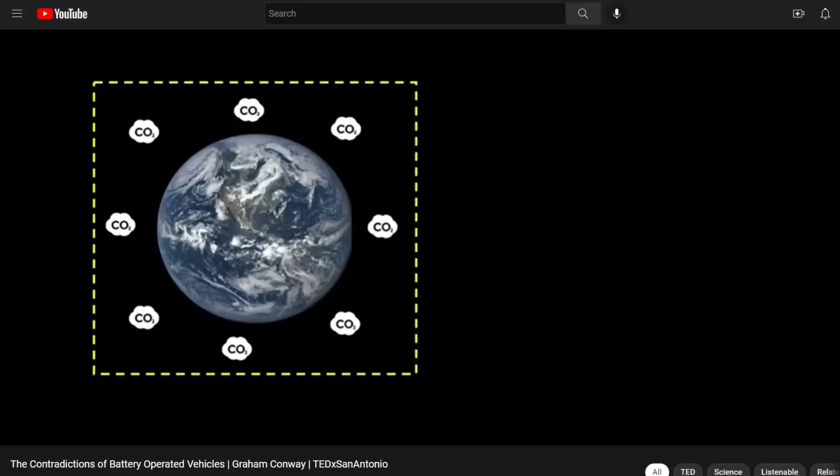The problem of climate change is a global one. It is believed to be caused by increasing CO2 concentrations in our atmosphere. If you put a box around the Earth and measured the gases trapped inside that box, you would indeed find CO2, and that CO2 levels are rising. What is causing CO2 levels to rise? Well, one source is the cars and trucks that we drive. These emit CO2 from the tailpipe, and the way the industry currently measures this CO2 is like putting a special box around the vehicle and measuring what's inside the box.

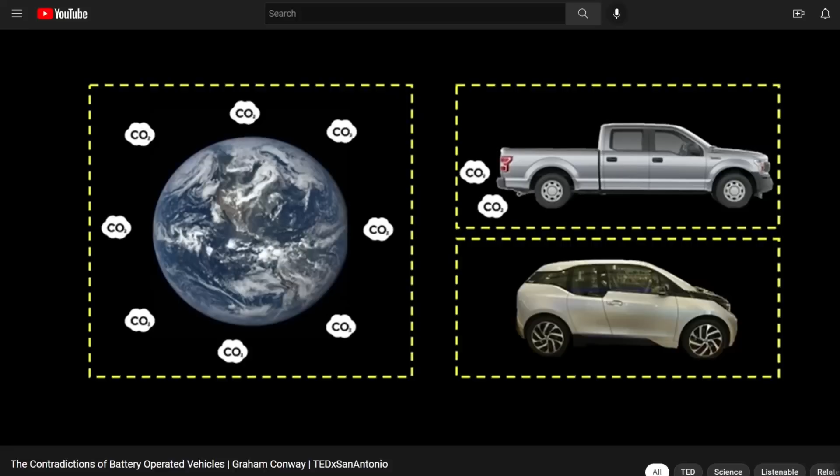Society's solution to the problem is the electric vehicle. Because if you put a box around the electric vehicle and try and measure CO2, you won't find any. So based on this way of measuring CO2, we've decided to call these zero emissions, and we call these dirty. But let me show you why this is wrong. Consider that instead of changing all vehicles into electric vehicles, we instead change them into horses. Now, a horse breathes in air and it breathes out CO2. So if you put a box around the horse, you would measure CO2.

If you rode that horse the same distance as you drove the car, you would find something quite shocking. The horse emits as much CO2 as a Corvette.

Okay, I want to pause it here. First of all, I think he started this talk really well. He comes up with a very controversial statement which gets everyone's attention, and then he talks about electric cars and the pros of them and how he believes in them. So it's very disarming. So I think he does a great job.

Conway works for a think tank that's funded by Tom Slick, who's an oil magnate, and so it's not an unbiased opinion, but I think we should go away from the idea that because something comes from a certain source, we can just discount it. I don't think that's the way to analyze data. You should analyze the data on its own merits. And if they're saying the truth, it doesn't matter what background they are or what bias they may have personally, because everyone has biases. And so we have to analyze what things people say on their own merits.

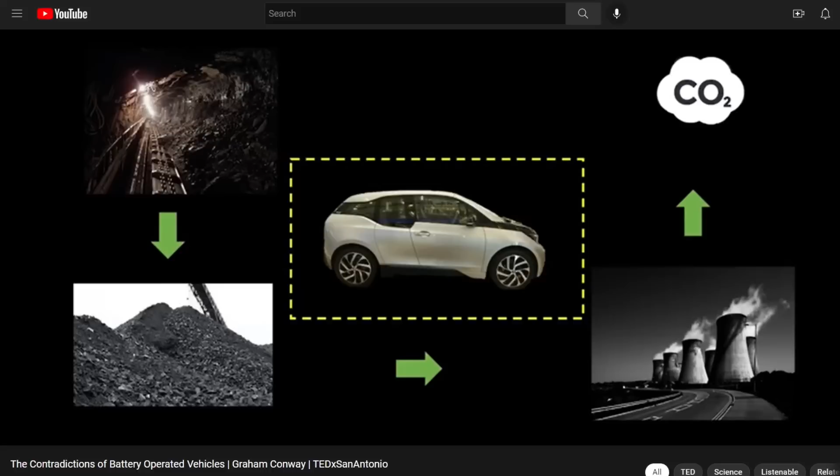A large proportion of our electricity comes from coal. Now, we dig coal out of the ground in large quantities. We then burn it in power stations, which produces CO2. You can see there is no arrow along the top of this diagram. That CO2 is not in a cycle, and it is increasing.

Okay, so I wanted to go back to that. He says a large portion of our electricity comes from burning coal. That's true on a global scale. On a global scale, places like China and India still use a ton of coal. In the United States, coal, I think, is less than 20% of our energy production. Natural gas is much higher, which is a much cleaner source in terms of CO2 production.

In the UK, it's even less than the United States. And different parts of the country use different energy mixes. If you live in the Pacific Northwest, it's a lot of hydroelectric. There's I think essentially zero coal in the Pacific Northwest. In California, it's very little coal, probably less than 10%. Much more coal out in West Virginia, Pennsylvania, Ohio, that area. So it depends on which part of the world and which part of the country, what your mix is.

But you couldn't possibly know this by only measuring the vehicle's tailpipe. What we need to do is expand our imaginary box to include everything.

And coal isn't the only way we generate electricity. We also burn natural gas and we burn oil. These two produce CO2. Now, you might be sitting there and saying, hang on a minute, I charge my electric vehicle from solar panels on my roof. So that's okay, right? Well, for you, maybe.

And many developed nations are moving away from coal and natural gas to renewable energy sources. But CO2 is a global problem. So let's have a look at things on a global scale. How much of the world's electricity is produced by burning fuel which creates CO2? It's about 2/3.

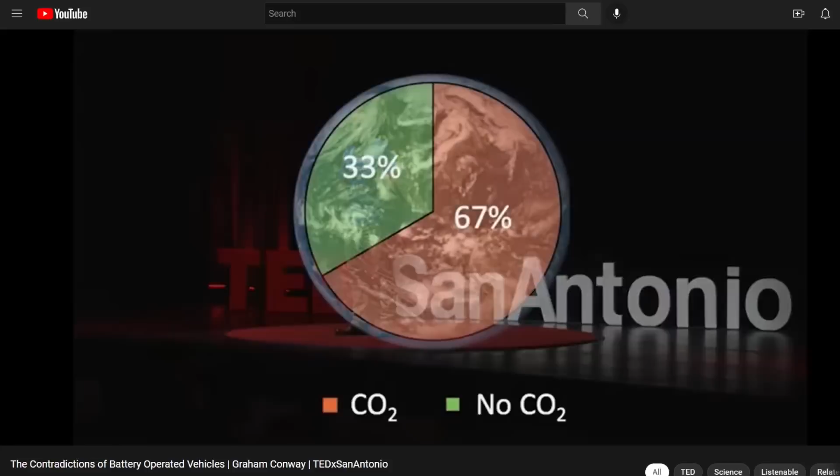Okay, so this is outdated information. It's about 10 years old. It's actually like 61% or 62% CO2 generating now. So you can see when you plug your electric vehicle in, you are probably producing...

Oh, and in California, during the day, in most of the summer, this green part is 100%. It's almost all solar. The energy mix in California, we talked about that in a video a few days ago, but the energy mix is changing. It is rapidly changing, so this is getting better.

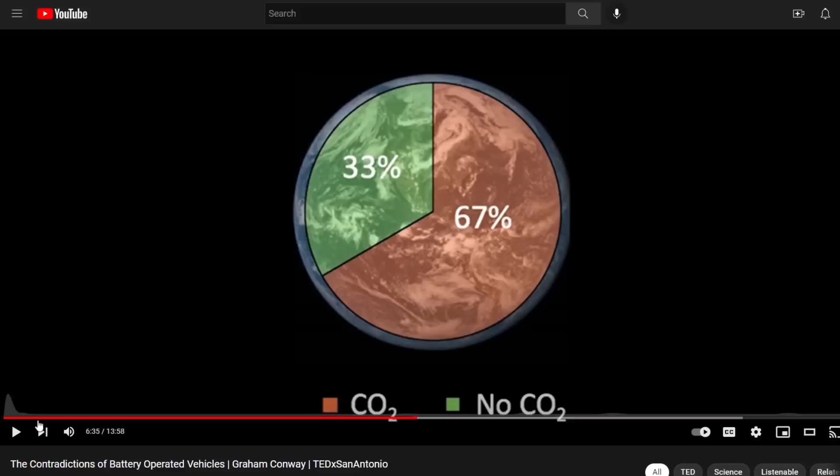CO2, it just isn't being measured. You see, the automotive industry has cleverly found a way to move the problem, not solve the problem.

But is the electric vehicle really worse? Well, to understand if it's worse, we need to look at how much emissions are produced during the life of the vehicle. The average age of a vehicle before it gets scrapped is around 180,000 miles. You can see the conventional vehicle produces about 30 tons of CO2 over its lifetime.

Okay, let's do the math on that. Okay, that's 27,200 kilograms. All right, so let's look at that. 27,215 kilograms divided by 180,000 miles. All right, so he's saying that this theoretic car produces 151 grams per mile traveled. As you can see from our previous things, that is a rather optimistic amount.

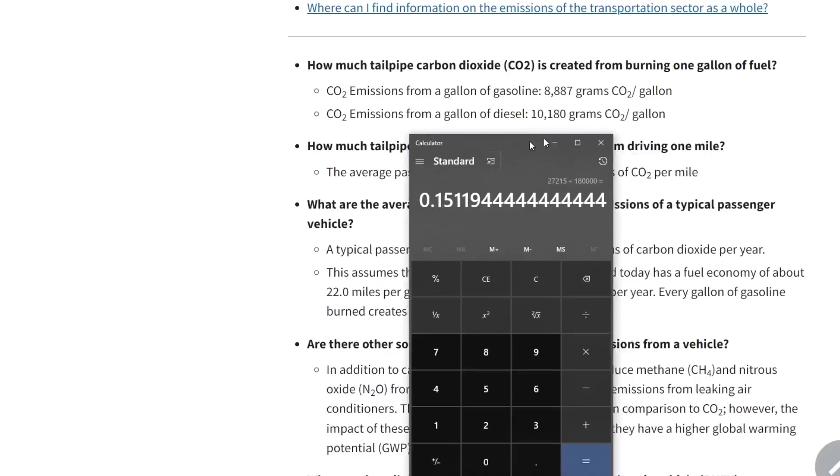So I don't think this is outright untrue, but definitely picking a value that makes his argument look better. Okay, so remember, if you're picking the average car in the United States, it's 3 times as high as this. And the average car in the UK is about 20%, maybe 30% higher than this.

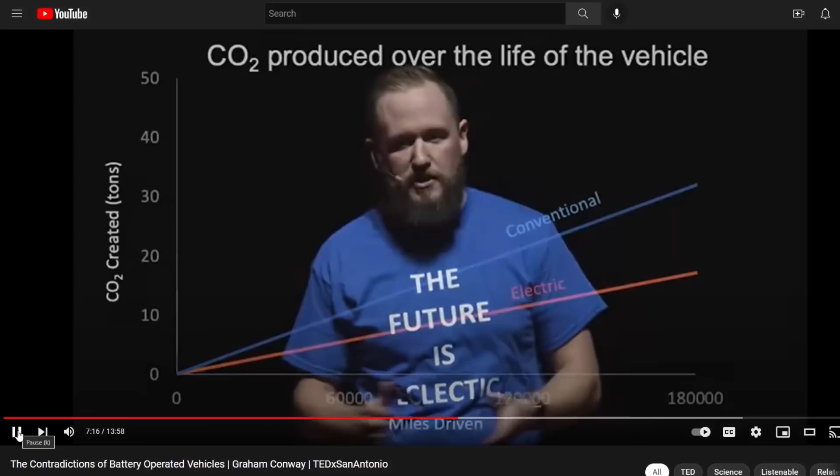How does the electric vehicle look? Pretty good, right? All right, so this is the crux of his talk, these graphs. So we're going to go over these graphs. So he's saying that a conventional vehicle is going to produce 30 tons over 180,000 miles. Now, we know that that's a very optimistic slope, right? In the United States, the conventional car is going to be 2 times that. So this number should be 60. So the slope should look more like this.

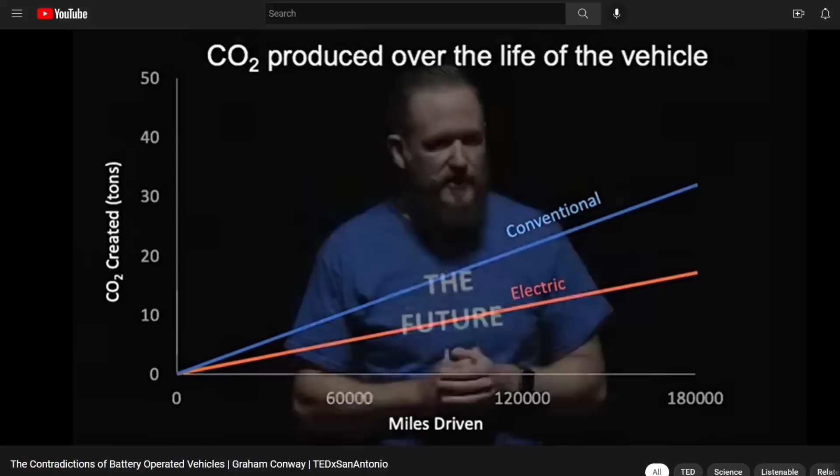But there is a problem with this graph. This graph says that at 0 miles, 0 CO2 has been produced. And if you think about that for a second, it means that the two cars have magically appeared in the showroom out of thin air. In reality, a huge amount of CO2 is produced just making a vehicle, because you have to dig raw materials out of the ground, transport them to factories where they can be formed into car parts before finally being assembled into vehicles. Each step requires energy, and so we create CO2. So you can see the conventional vehicle comes to the showroom having generated about 6 tons of CO2.

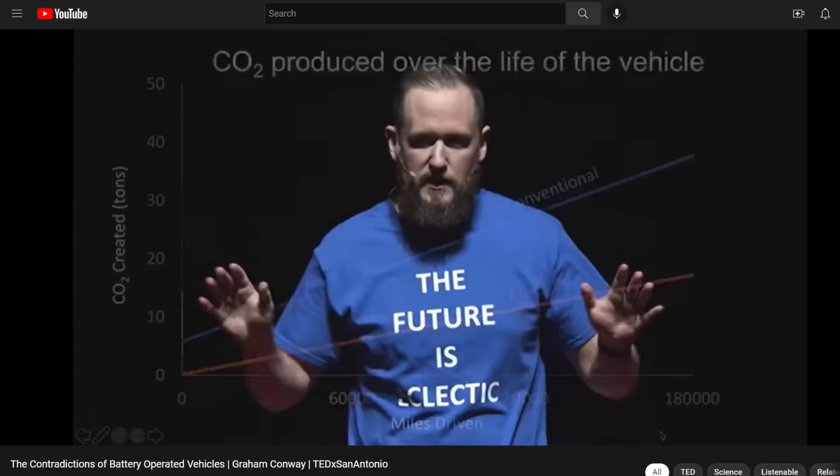And now this is the critical part. Making a battery isn't easy. The materials required are harder to find, and making a battery cell requires a huge amount of energy. So the battery vehicle comes to the showroom having generated about 12 tons of CO2. And you can see you'd have to drive it around 80 or 90,000 miles before you offset that CO2 penalty. All right. So he's making the assumption that the battery of this electric car produces 6 tons of CO2 at its creation.

And remember, these slopes are unrealistic. This slope should be much steeper, like this. And in fact, it should be even steeper than that, because what you don't take into account is he's taking into account the total cost of production of electricity, however, only measuring the tailpipe CO2 production of a gas vehicle. You have to understand that creating gasoline also is expensive. You have to prospect for oil, drill for oil, extract the oil, transport the oil, refine the oil, and then transport the gasoline. So if you do all that, this study said you have to add about 30% for gasoline and 24% for diesel.

So if the average car in Great Britain is 221, you have to add 30% to that. Or in the United States it's 440 grams of CO2, you have to add 30% to that. So if you add 30% to this, it makes it like 550 or something like that. So 550 is basically 4 times this much. And if you do that, this graph should top out not at 36, but at like 120. So this slope should be like this.

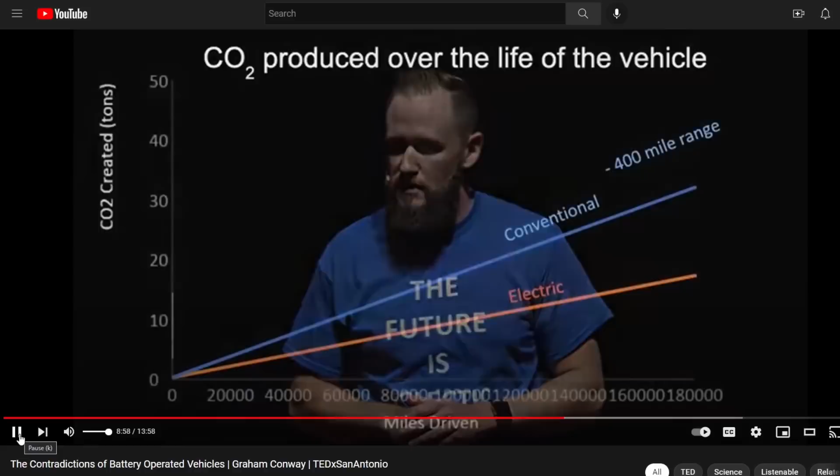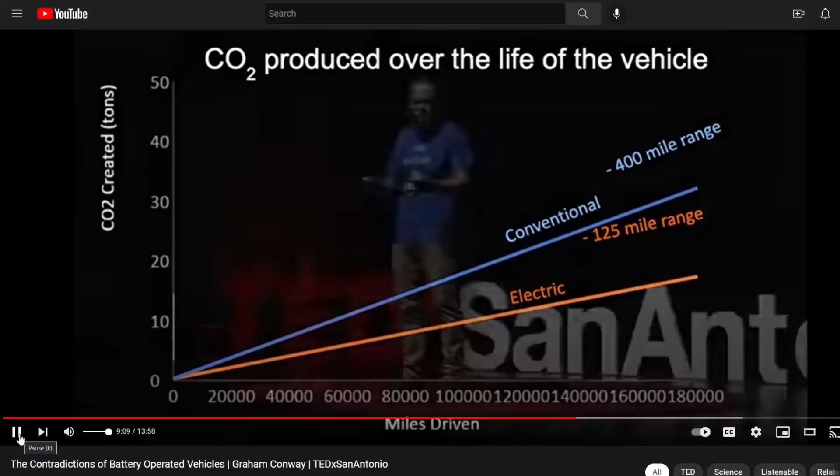You see, the conventional vehicle has a 400-mile range, while the electric vehicle in this example has a 125-mile range. Now, 125 miles might be enough for some of you, but most of us want more. We'd like to be able to drive great distances across the states. Or if you're here in Texas, you might just want to get to the next city. So really, we need to be comparing a 400-mile range electric vehicle. And as you may have guessed, a longer range requires a larger battery, which means a larger CO2 penalty. And now you start to see the problem.

All right. So this is kind of the money shot for him. So number one, I think as most of us are interested in the Aptera, this 125-mile range battery in an Aptera would be a 400-mile Aptera, because the Aptera is about 3 times more efficient than the average electric car. So this electric car with a 125-mile range probably has a 40 kilowatt battery, but the 40 kilowatt battery in an Aptera will go 400 miles.

This 400-mile range electric car is about like an 80, 90 kilowatt hour battery or 100 kilowatt hour battery. And so that's going to take a lot of electricity. But how much electricity does it take? And we know that it generates a lot because mining raw materials like lithium, cobalt, nickel is labor intensive, and then they have to dry it and refine it to manufacture batteries. It takes a lot of CO2.

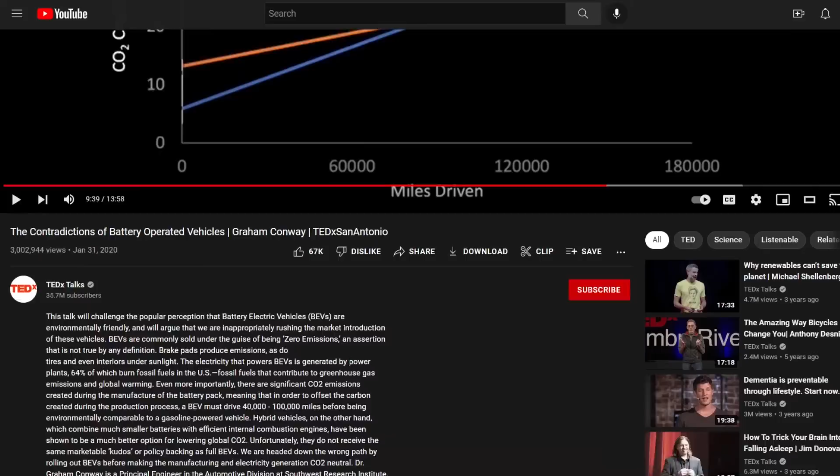So if you look at this, and you know what? One of the things you have to say is when you try to decide who you're going to believe, it's important to look at the sources. And this guy, unfortunately, in TED Talks, you don't cite sources. He didn't put them in the description or anything. So you don't know what sources he's getting this from. I'll put all the sources in the description of this video.

But if you look at this, they looked at several different studies and they show how much CO2 they're producing per kilowatt hour of battery production. And you can see this range is huge. It ranges from like 30 to 500. That's a range of greater than 1 order of magnitude. And that has to do with the methodology of these papers, the way that they measured it, and also what energy source they were using.

So in this one, it assumes a manufacturing grid representative of East Asia. So basically they're using a Chinese manufacturing grid. So that's a very dirty manufacturing grid, a lot of coal. And the battery chemistry makes a big difference. So they can go anywhere from 30 to 400.

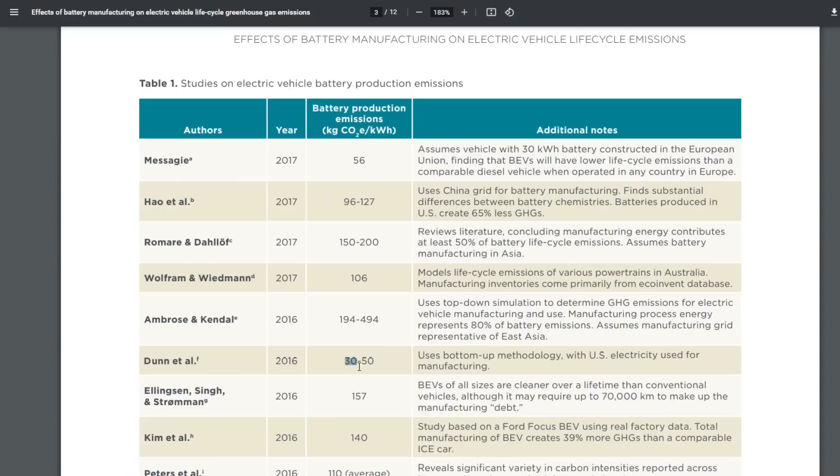So if you look at this, the Tesla battery, let's see what 16 metric tons is. Okay, so 16,000 kilograms in tons, because he's using imperial tons. So that is 17 tons. He's saying that this 400-mile battery is going to add about 20 tons. So that's more than the upper range. This is saying 18 tons, he's saying 20 tons. So he's using the upper range of this scale. If you use the lower end of the scale, that's 2,400 kilograms. Let's see.

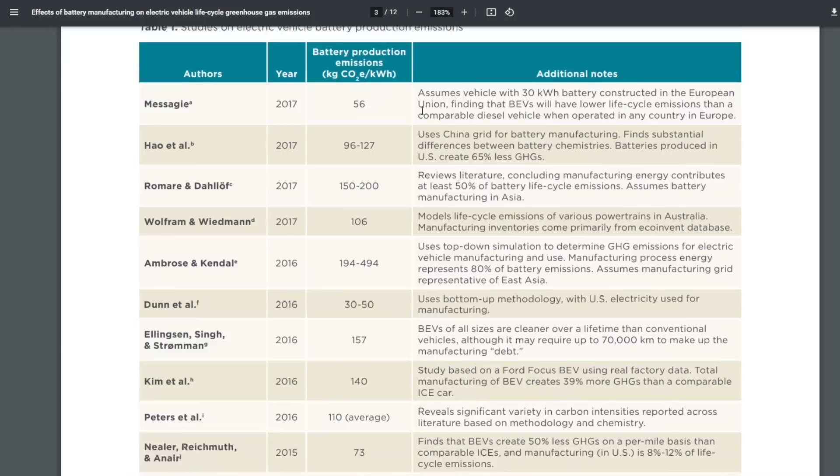So you cherry pick all the data. You use the worst over its expected lifetime. You use the worst possible manufacturing situation for the electric battery. Then you use the best possible scenario for the gas car. And then you don't take into account any of the costs of producing the gasoline and delivering it to your tank.

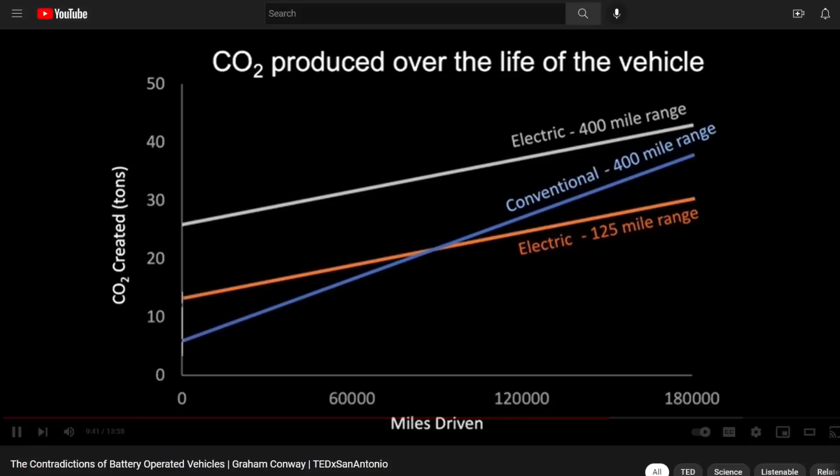It has emitted more CO2 than the conventional vehicle. It has contributed more to climate change than the conventional vehicle, and that is the crux of the problem. It has produced more CO2, but we've measured none. And so society is happy to continue to call these zero emissions. But that is dangerous and unproductive.

But there is something we can do today, using technology we have today, which will make a difference today. And that is to look at hybrids. Hybrids are far more efficient than conventional vehicles because at low speeds, where the engine is inefficient, the electric motor compensates and says, "Don't worry, engine, I've got this. You stay turned off until we need you." And critically, a hybrid has a small battery. So the initial CO2 penalty is similar to the conventional vehicle, while the end-of-life emissions are far lower. In fact, to offset the CO2 from the electric vehicle, you would need to drive it around 450,000 miles.

Okay, again, that is not true. That's only true if you're assuming the worst case scenario for the electric battery and the best case scenario for the ICE or the hybrid car. And if you don't make those assumptions, the graph looks totally different. The crossover point is probably at like 10,000 miles before you offset that CO2.

So if you make the scenario the complete opposite, you assume the best case scenario for the electric and the worst case scenario for the ICE car, the crossover point is probably at like 10,000 miles. The actual crossover point probably is somewhere in between, probably at like 50,000 miles. That's assuming a 400-mile range traditional vehicle. Now, for the Aptera, it would be much, much less.

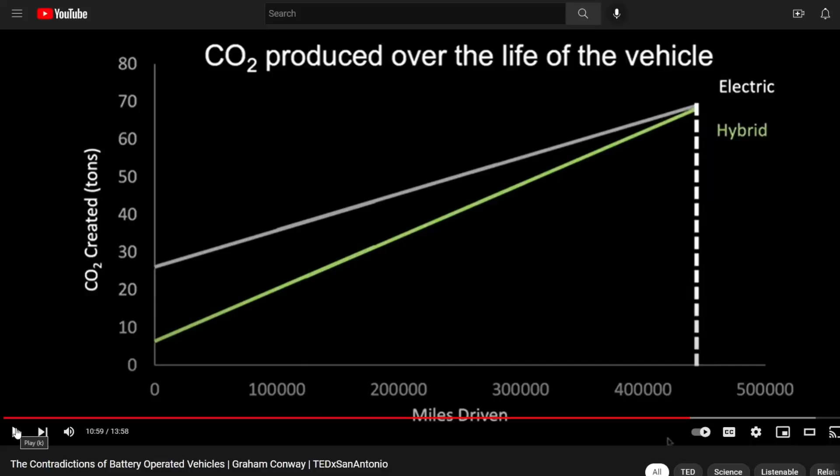But again, I don't want to demonize the electric vehicle. I just don't think we should adopt them today based on the way we generate our electricity and the way we make our batteries. But how can we help the electric vehicle meet its potential? Well, we need to invest in making our electricity generation from renewable sources around the world, so that when we plug our electric cars in, we know there is no CO2 being generated.

I kind of want to go back and talk about this a little bit too. So solar and wind, those are great, but we know that they have their own problems too. Like these turbines, they're huge. They're made out of fiberglass. They're very hard to deal with at end of life. They create a lot of waste.

Same with solar panels. Solar panels are silicon, so they're not a very valuable raw material. It takes a tremendous amount of energy and labor to recycle these, so they're not being recycled. It's just not economically efficient to recycle these things. And so they don't create CO2 as a problem, but they create a lot of waste.

So, the ideal situation obviously is that we use less stuff. This is not the magic answer to everything. Like once we get solar panels and wind things, we can't just go spend all the energy we want. Using less is always better. Being more efficient is always better, which is why I love the Aptera philosophy. Just being more efficient is always better, and using less stuff is always better. Because technology is not going to magically fix all of our problems.

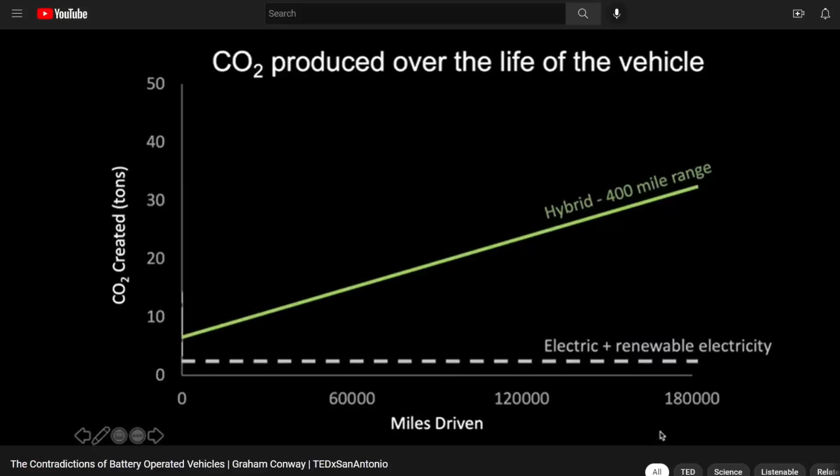And so you can see the potential of the electric vehicle. You can see what it could look like in the future. It's just, as a society, maybe we're trillions of dollars and decades away from being zero and zero. But right now, it's already pretty good. But we will get there one day.

But what we don't want to do today is mislead people into buying electric vehicles by falsely calling them zero emissions. Yeah, that's true. They are not zero emissions, and I hope no one actually believes that. They're not zero emissions, and electric cars are not the panacea for all of our climate woes. Definitely not. And like I talked about, solar and wind, that's not a magic bullet either. They have their own set of problems.

I mean, the best thing to do is to use the least consumptive thing to do the job that we want to do, which is why I personally bike to work every day. I think the bicycle is kind of the best thing. It uses your own energy, and most people have excess calories. We're all a little bit overweight, and we could use the fitness, so we're not using any extra energy. It's just energy we need to burn off anyway, and a bicycle does not take that much energy to produce, and it lasts a long time.

My previous bicycle, I commuted for 15 years with it before I retired it. And that's why the Aptera is a very efficient car, and it's perfect for that. It uses the least amount of energy to transport you and some stuff a long distance, and that's why I think it's important that we don't think just because a Hummer is an EV, that's the greatest thing.

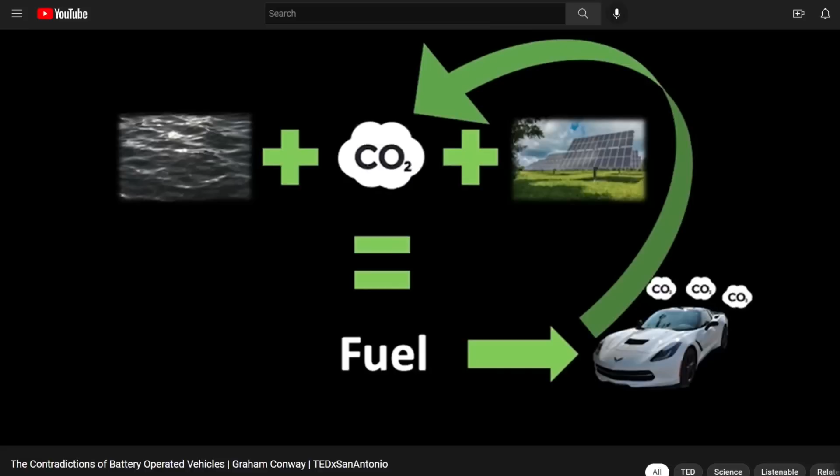And we can look into renewable fuels. This is where we combine water with the waste CO2 to create fuels for our vehicles. Now, there's a good reason we don't do this today. It requires a huge amount of energy to do this. But if all that energy comes from renewable sources, then it isn't a problem for the climate. But it's a problem for the waste stream. So you see, we've created a new CO2 cycle.

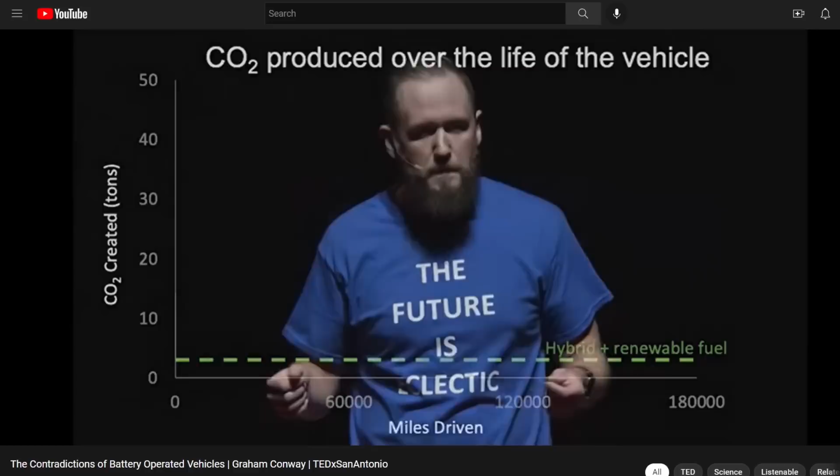And you can see how fantastic that looks for the hybrid vehicle over the lifetime emissions. Even without renewable fuels, we should still consider buying hybrids today if we want to impact climate change now. In the future, there will be conventional vehicles, hybrid vehicles, and electric vehicles where they make sense. The future is not just electric, the future is eclectic.

Okay, so yeah, he's pushing hybrid vehicles, and I think hybrid vehicles are fine. They're better than conventional vehicles for sure. But the assumptions made in his talk are taking the best case scenario for internal combustion vehicles and using the worst case scenario for electric vehicles and comparing them to each other, which is a little disingenuous. So I will link all these studies below, and you can look at these and judge for yourself.